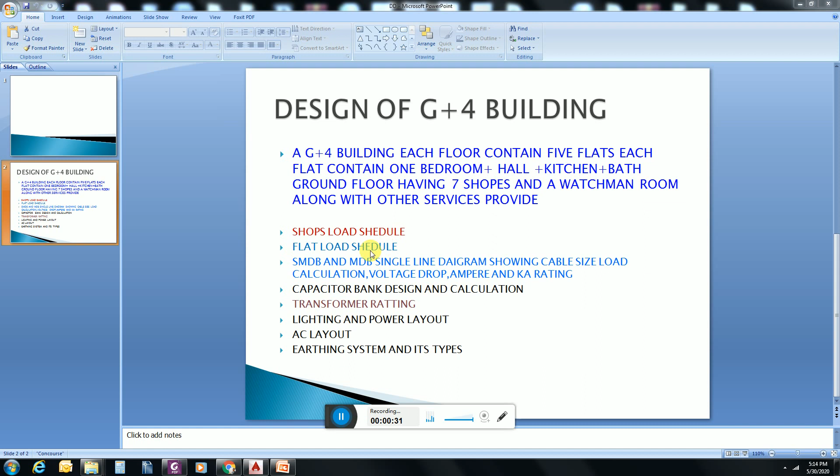As you know, we are designing a G+4 building, and in this design we already covered the first two steps: shops load schedule and then flat load schedule. And today I am going to teach you how we can make a single line diagram of SMDB for shops. Then definitely we will make a SMDB for flats, and then next.

So in the load schedule we calculated the shop load as 8.1 kilowatt. If you didn't watch my previous videos, you will not understand the story. So to understand this lecture, you must watch my previous videos, where I started a series covering the whole design.

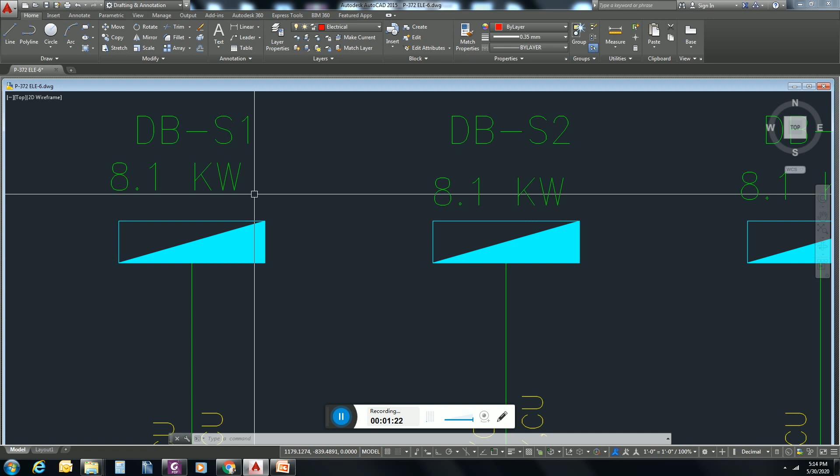So all shops are typical. It means that all shops are the same, and the load of each shop is 8.1 kilowatt. Here you can see this is the DB of shop 1 showing its load. Its load is 8.1 kilowatt. It means that the ampere rating will be 14.094, and I already told you that if the ampere rating is less than 40 ampere, then we will use an MCCB of 40 ampere.

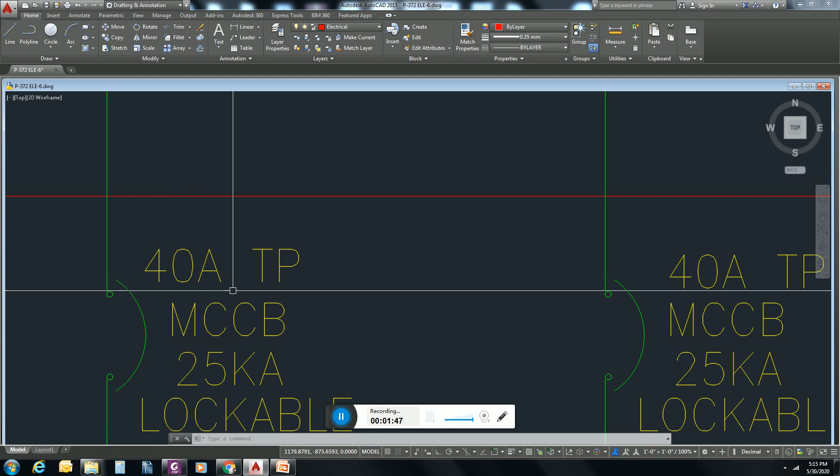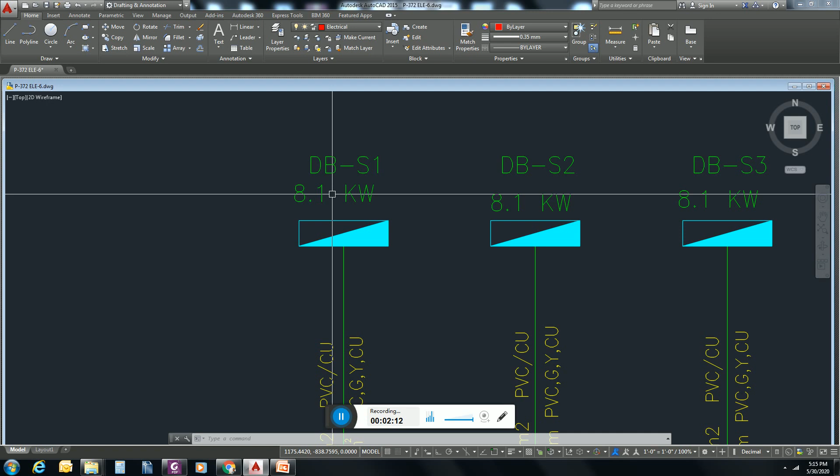40 ampere TP MCCB, its kA rating will be 25. Remember, in every SMDB, the kA rating of all outgoings will be 25kA. This MCCB is lockable. The reason is that there is a meter for this shop, and if your load is more than 7 kilowatt, you will use a 3-phase meter. So from the SMDB, the cable will go into the meter, and then it will go to the shop DB.

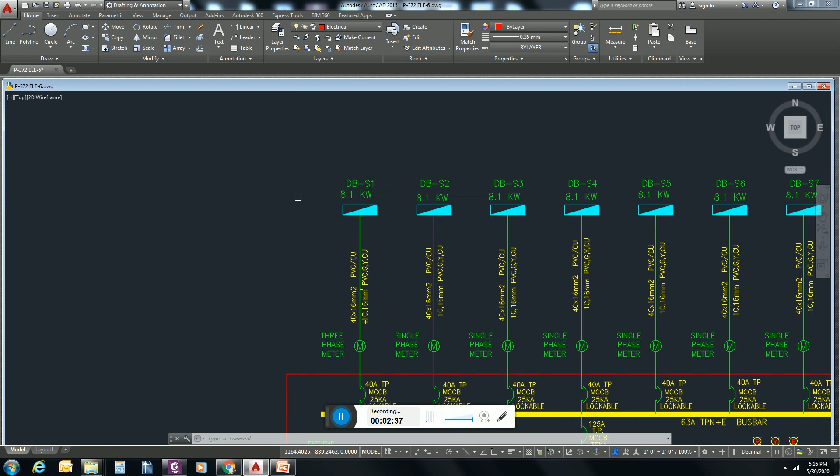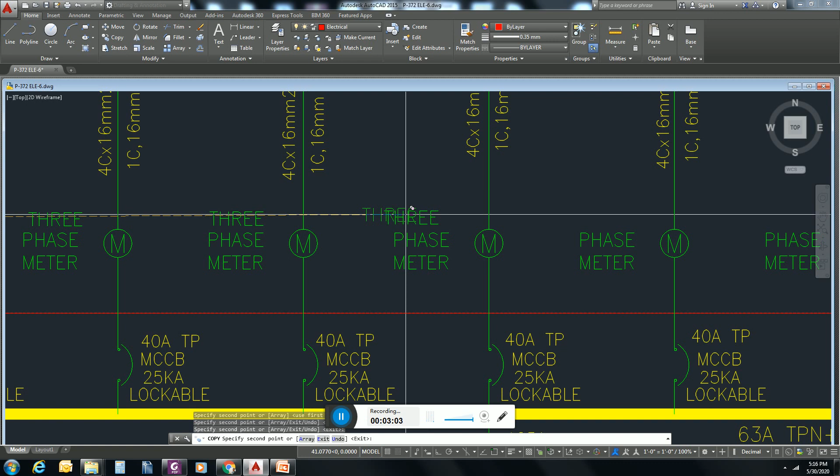Similarly for shop 2. One thing, there is a mistake here. I wrote single phase meter, but there will be a 3-phase meter because the load is more than 7 kilowatt. If the load is less than 7 kilowatt, you can use a single phase meter, and if your load is more than 54 kilowatt, then you will use a CT meter. From 7 kilowatt to 54 kilowatt, there will be a 3-phase meter.

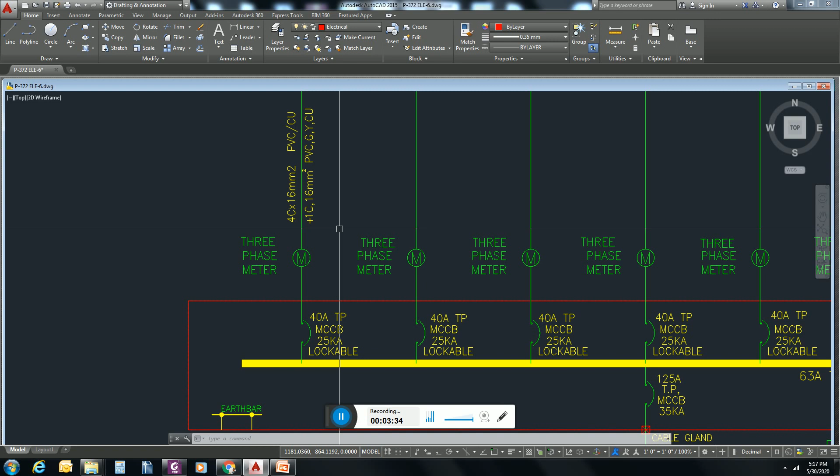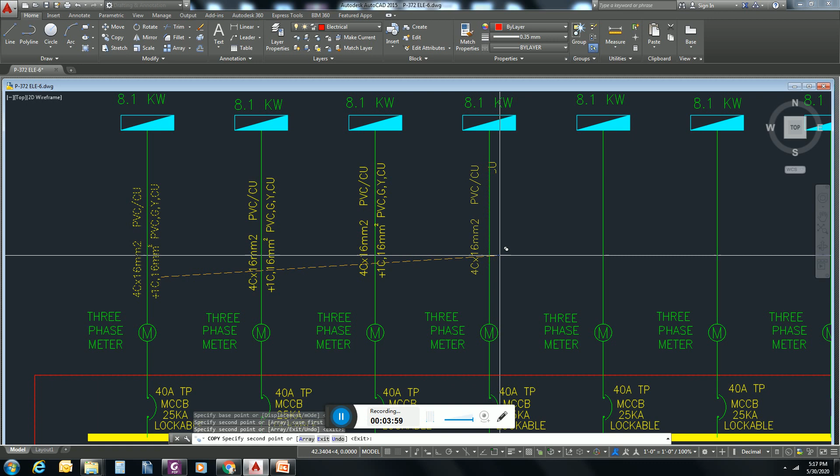So the load is 8.1 kilowatt, and for this load there is an MCCB of 40 ampere. What will be the cable size? Cable size will be 4 core 16 mm. Why am I writing 4 core 16 mm? The reason I already told you in the table mentioning all cable ratings with respect to MCCB. So the cable for all shops will be the same, because their load is the same and their main breaker is the same. Cable size is 4 core 16 mm square PVC CU, and here are 3-phase meters.

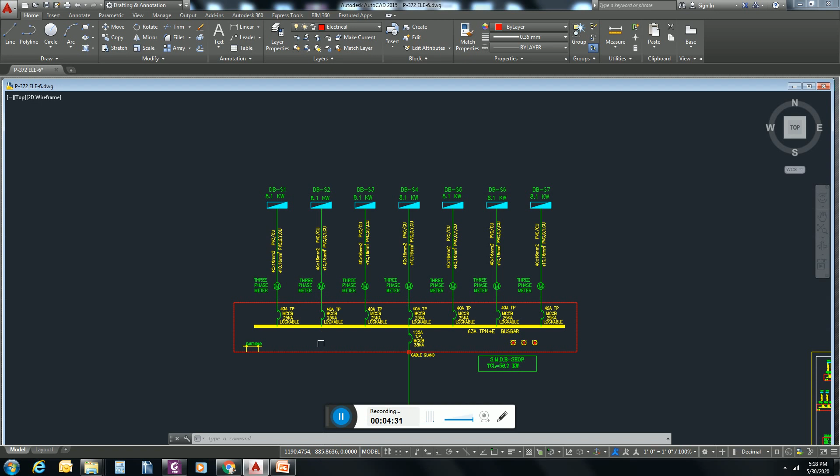You have to show the SMDB single line diagram just like that. So this is a bus bar connected with all these breakers, MCCBs. The load of one shop is 8.1 kilowatt, and the load for 7 shops will be 56.7 kilowatt. So the load for this SMDB will be 56.7 kilowatt, and for this load, first I will calculate the ampere rating. Hopefully you can calculate this, because I already told you how to calculate ampere rating from kilowatt rating.

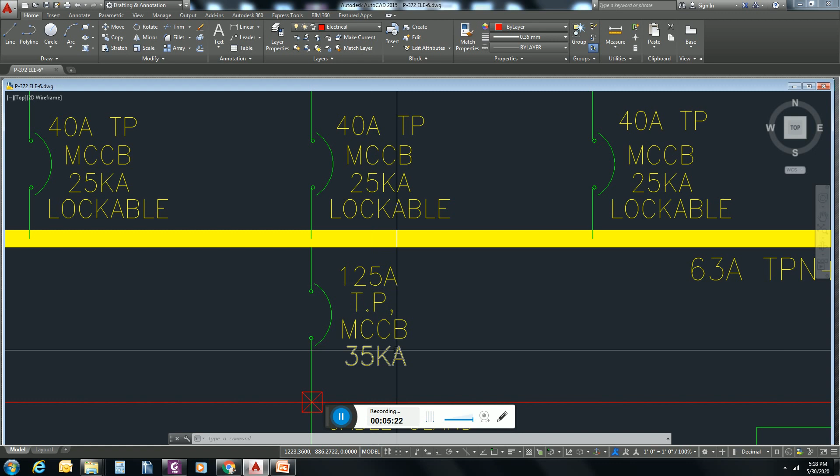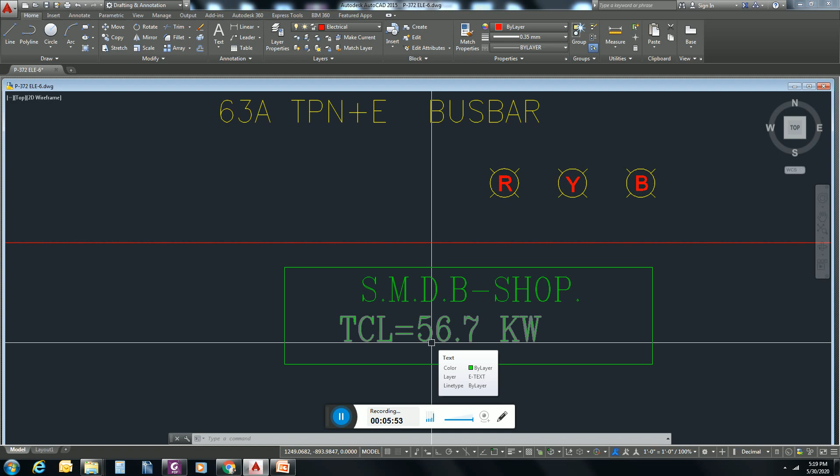After calculating the ampere rating, I will write here 125 ampere TP MCCB. So the main MCCB for this SMDB will be 125 ampere. Why do I write 125 ampere? With respect to load. On this load, the ampere rating will be 98.658. I can use 100 ampere here, but it's my choice, so I choose 125 ampere for this SMDB. If someone writes 100 ampere, it will not be wrong.

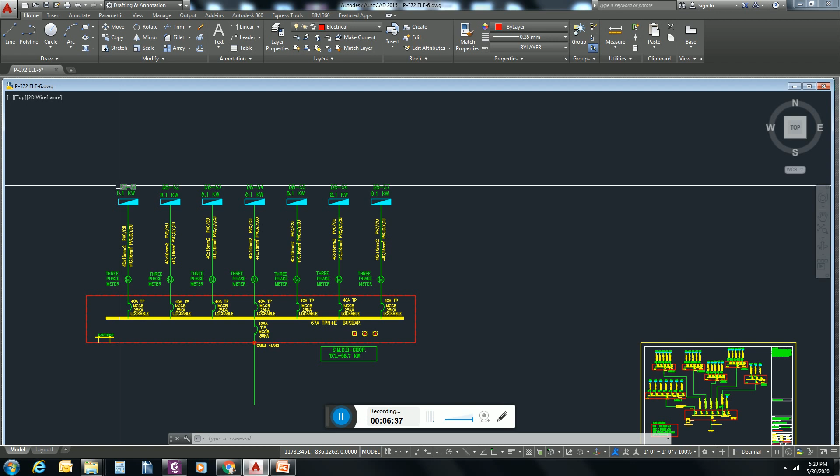So this is the SMDB for shops. As there are 7 shops on the ground floor, you already designed a DB for the shop, and now we design a SMDB for the shops. There will be a SMDB like that, and from this SMDB we will take 7 outgoings for 7 shops. I think everything is clear here.

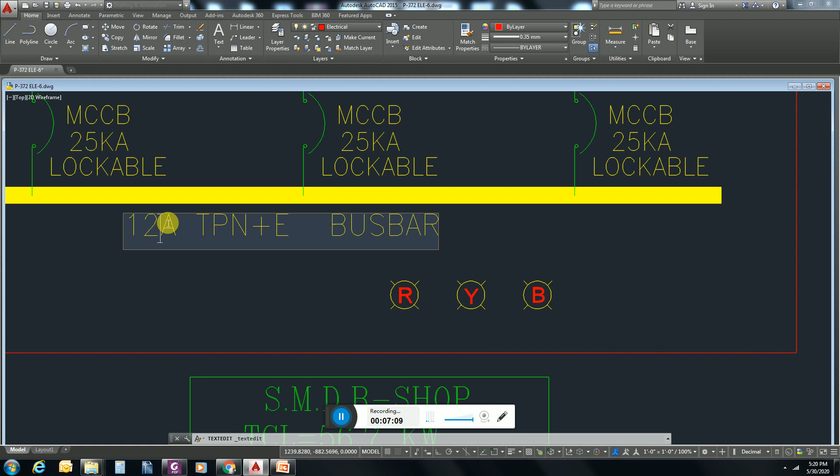There will be a separate bar inside the SMDB called the earth bar, and here there will be indicators red, yellow, blue. The bus bar size will be 125 because its main incomer is 125, so the bus bar rating will be the same. This is the SMDB for the shops. It's very easy and very simple. In the same way, we will design a SMDB for the flats.